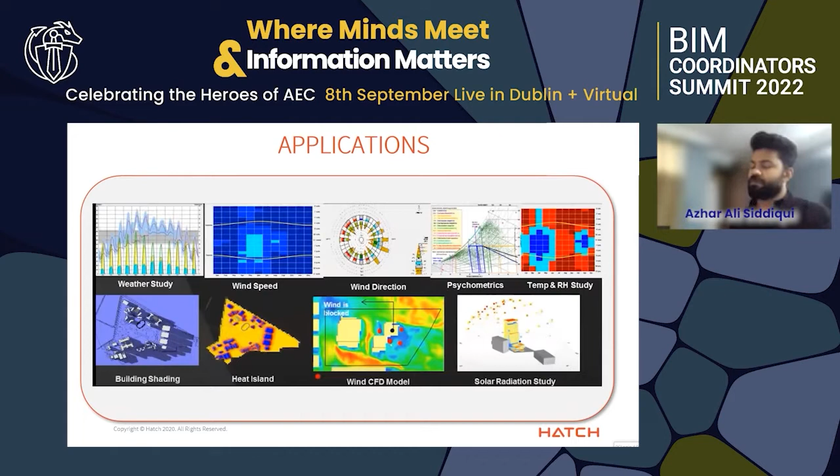These are some of the sustainability requirements from clients in the industry today, and they're growing almost every day, getting more and more demanding each passing year as we inch closer towards the ambitious net zero goals set by respective countries for their infrastructures. As I mentioned, clients are getting more and more demanding.

Here is one of the examples we are going to take as our first case. I want you to focus on the blue box here: the requirement in this case from the client was to bring down the heat gain from the envelope to less than 1 watt per square foot. But how do we quantify such a thing? They wanted 80% daylight space, zero glare, and this is only the envelope depth performance we are talking about.

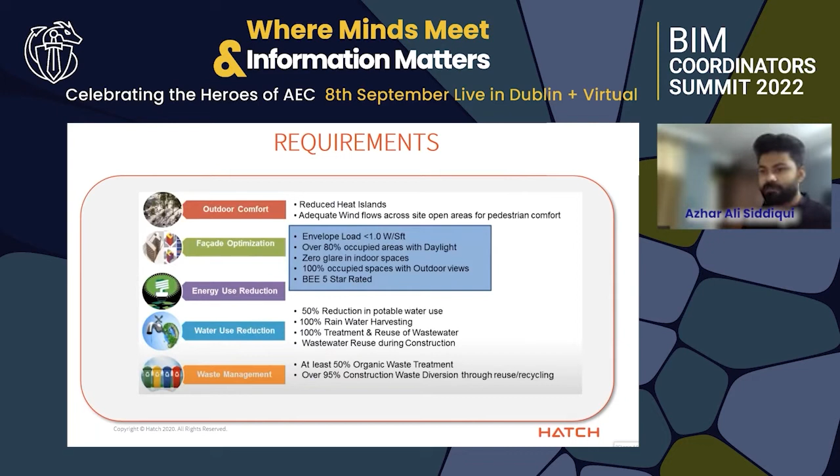This is where BIM as a process, along with its modeling and simulation tools, comes into the picture. In this case, there was a site, and on one side we had three buildings.

Here you can see the glare analysis results in front of you, where the glare component was extremely high. Building A and building B are still in control, but for building C, it's just out of limits, going over the roof.

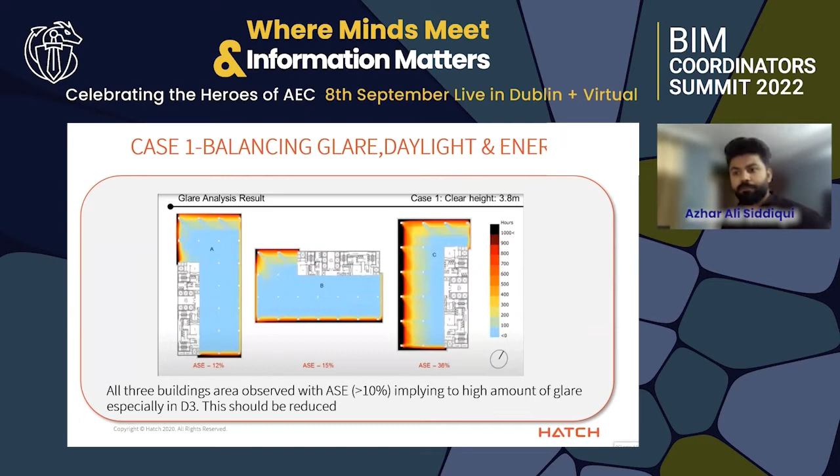The solutions, of course, we do have solutions for that: putting shading devices, using glasses of suitable types. But how do we make the selection? As a first solution, we decided to play around with the type of glass that we are going to use on the facade.

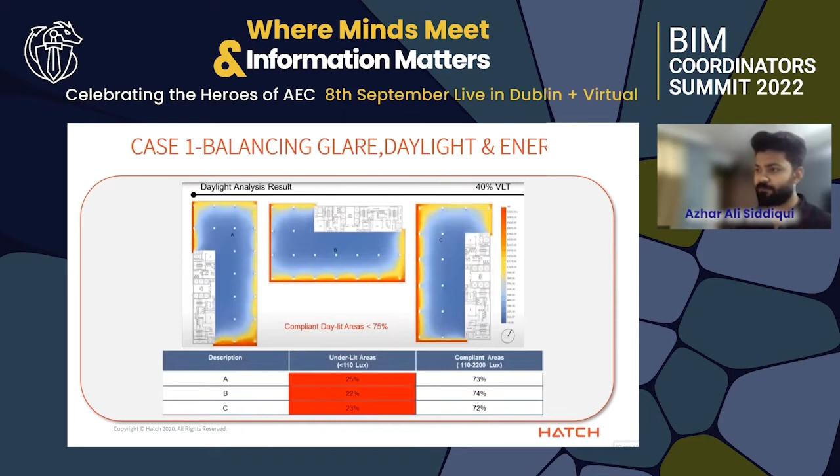We ran daylight analysis with 40% VLT glass, a low VLT glass, checked for compliant daylit areas. They were not meeting the requirement of at least 80% daylit space in the office set initially by the client. We moved forward and checked with 50% VLT glass. Improved results, but still not enough.

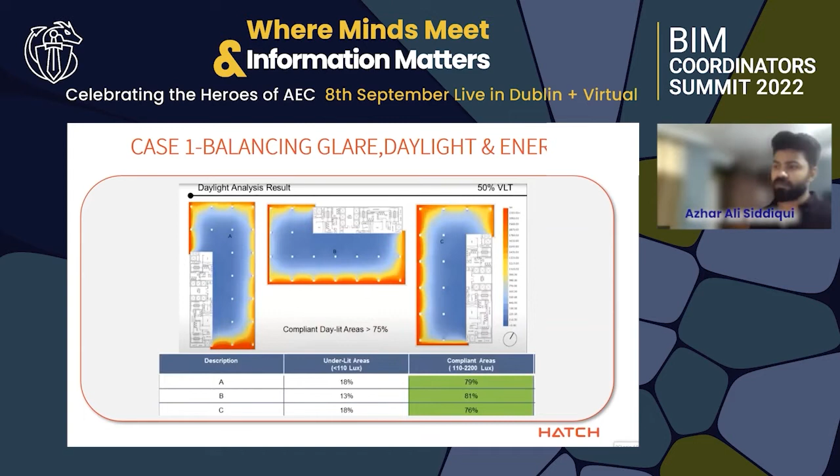We were running simulations continuously using different types of glass. Then we decided to run daylight analysis once again using 60% VLT glass. Building A and B, you can see, were well within the compliance range. Building C, almost there, not exactly how much it should be, but almost there.

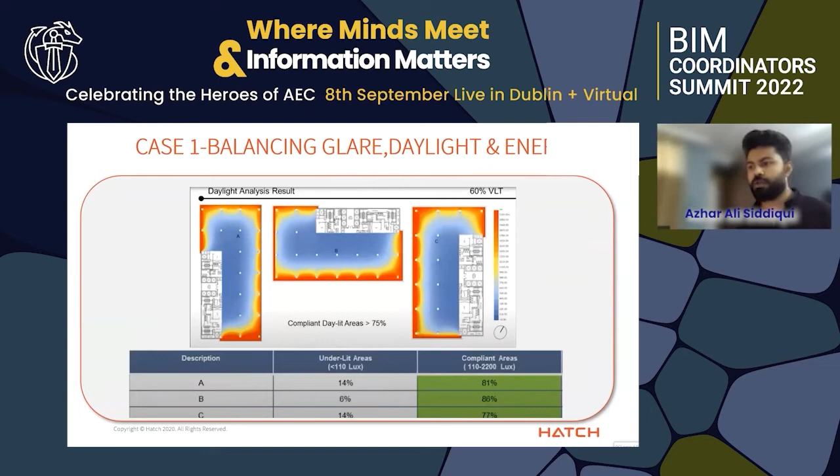We decided to stop here and combine this with other solutions, figuring out that we can always come back, increase or decrease the VLT, and run analysis again if requirements aren't met to see if 60% is sufficient. Another thing we did here was design the shading devices for the facade using parametric modeling.

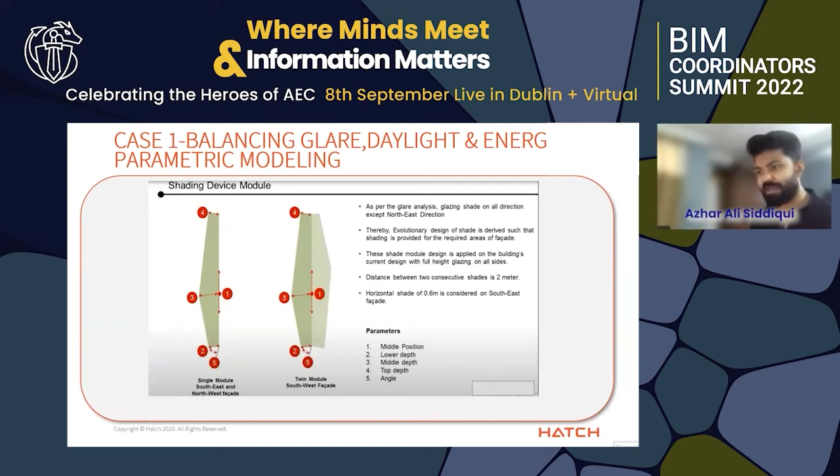We optimized these parameters so that shading is provided for the required areas of the facade. We ran multiple iterations for those parameters: what should be the optimum spacing, optimum angle, and optimum values for different options of shading devices.

We looked for results in terms of areas covered and sunlight exposure. This was done for the shading devices of the facade all around the building, and checked for the best case scenario year round.

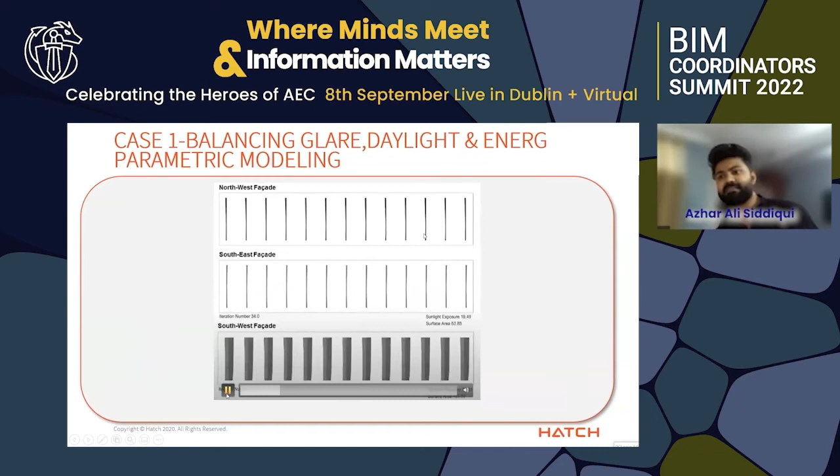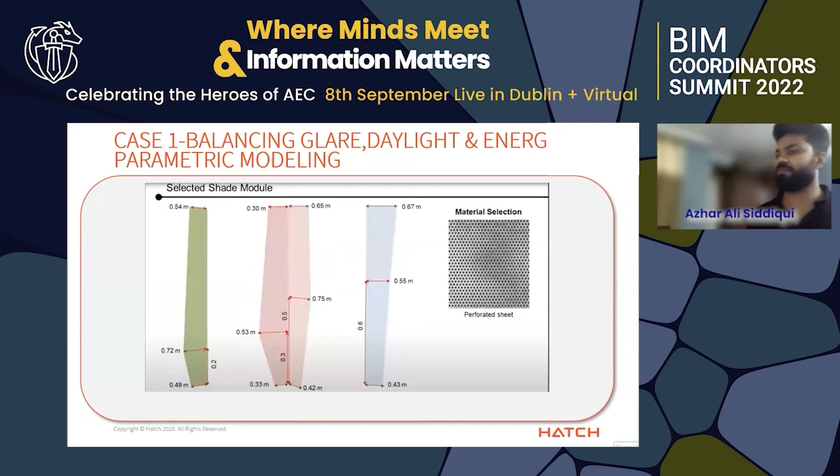So these are a few iterations we ran for this particular shading device. Through multiple iterations and discussions among architect, mechanical engineer, and sustainability consultants, we were able to get these results. The parameters are optimized on further discussion with the integrated design approach team.

We made sure that the glare component and energy concerns are addressed without compromising the daylight requirements. Each and every parameter is tailored for precise need, resulting in proper shading along with savings in terms of material cost.

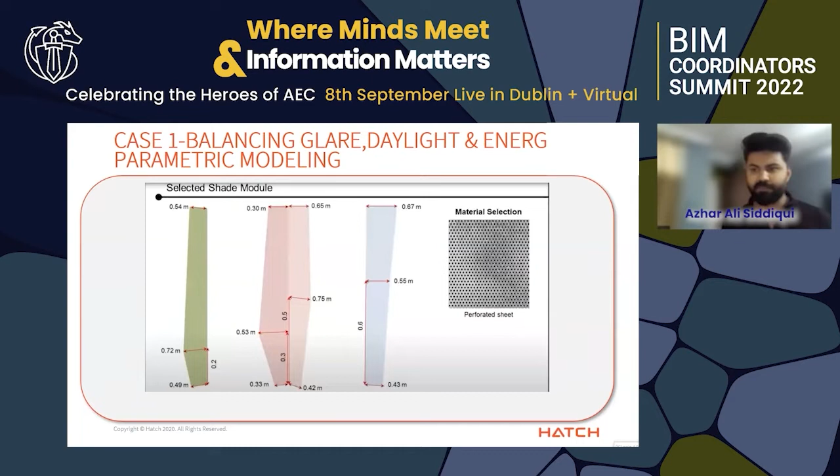This is the glare analysis result after considering 60% VLT glass and using the shading devices we designed in the previous step. We combined both of them.

We combined the results from using 60% VLT type glass with the parametrically designed shading device we just saw in the previous slide. So the glare on building A and B, as you can see, is addressed and is now in control. For building C as well, we saw some sharp reduction in the glare component, but it's still above the required limit. So we decided that we will move forward with 75% VLT glass type.

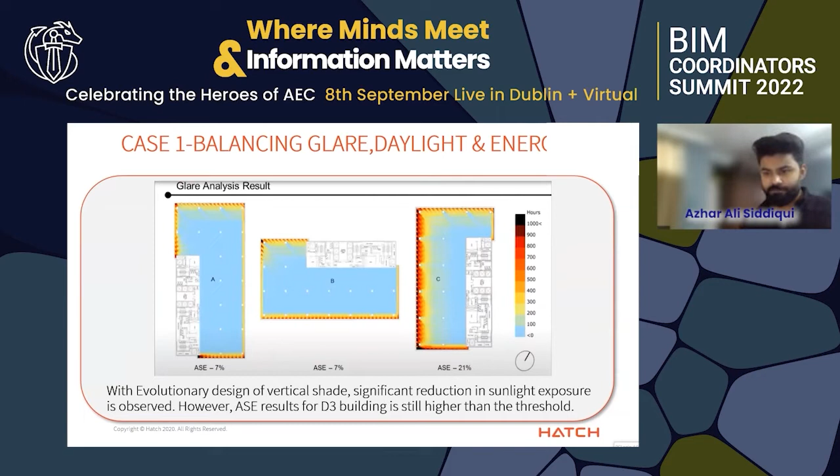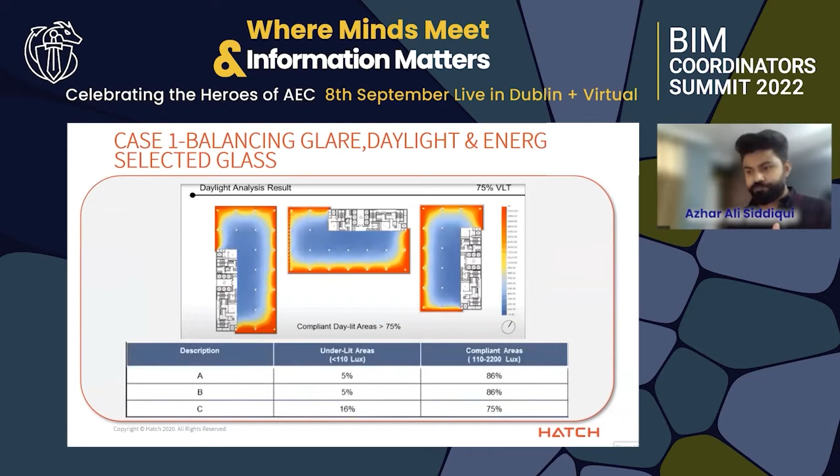We picked up the 75% VLT glass type, ran the daylight analysis once again, and combined the results with the shading device. We were able to satisfy 2 of the 3 major requirements here, getting 75% daylight space along with reduction in the glare component.

Now we had to take care of the envelope load. For that, we decided that we would optimize the window to wall ratio in conjunction with optimizing the U values of the building envelope.

We started by comparing our options with ASHRAE's baseline. As you can see here, we decided to compare our options of window to wall ratio: what are we supposed to get, what are we supposed to use, and compare that with the ASHRAE baseline values.

Of course, greater the window to wall ratio, more will be the annual energy demand. So we have to keep it low, but also keep in mind the daylight requirement. So it's a trade-off, basically—a complex one to get, no doubt about that.

But this is where BIM comes into the picture as a process, setting up the base for this trade-off by making iterations a lot quicker and more accurate compared to manual calculations.

We decided that we'll move forward with 69% window to wall ratio, keeping in mind the daylight requirements, and decided that we can always come back and make adjustments if the envelope load becomes uncontrollable even after further optimization in the U values.

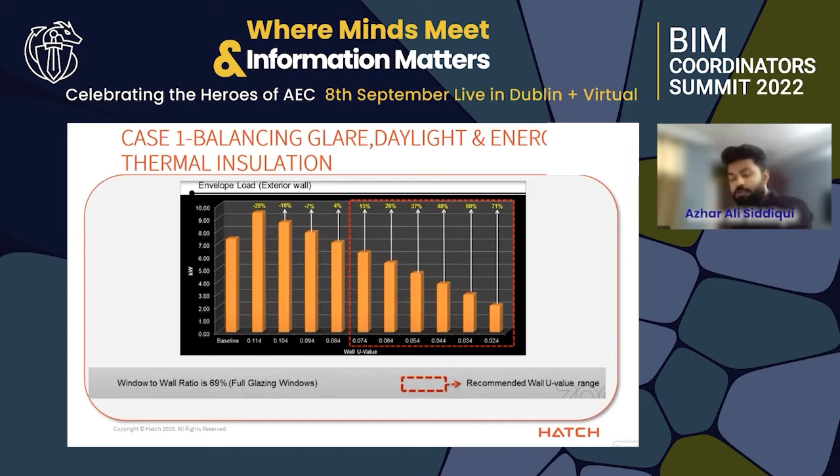Then finally, we optimize the thermal insulation of the building envelope, which is basically the U value. We optimize the U values for external walls, roofs, and fenestrations, and we also checked one for roof, one for fenestration, and then one for fenestration with shading devices as well.

Once we had the best case scenario U values that were less than what the ASHRAE baseline had to offer, and we had to keep it less than that because we were aiming for an envelope load of less than 1 watt per square foot, which is close to 25% less than what a conventional building generally possesses.

We made our recommendations based on different capital costs in case of multiple options. For example, there are multiple options and recommendations, and selection was made based on the different capital costs of these recommendations. Finally, after interdisciplinary discussions and multiple iterations, we were able to generate this recommendation table for the overall envelope load.

We compared our recommendations with ASHRAE recommended baselines. All of these recommendations for U values, in combination with the selected window to wall ratio, use of the shading device designed in previous steps, and proper glass type selections for the facade, helped us achieve the initially discussed requirements, giving out a sustainable solution that is environmentally beneficial, economical, and catering to the comfort of society.

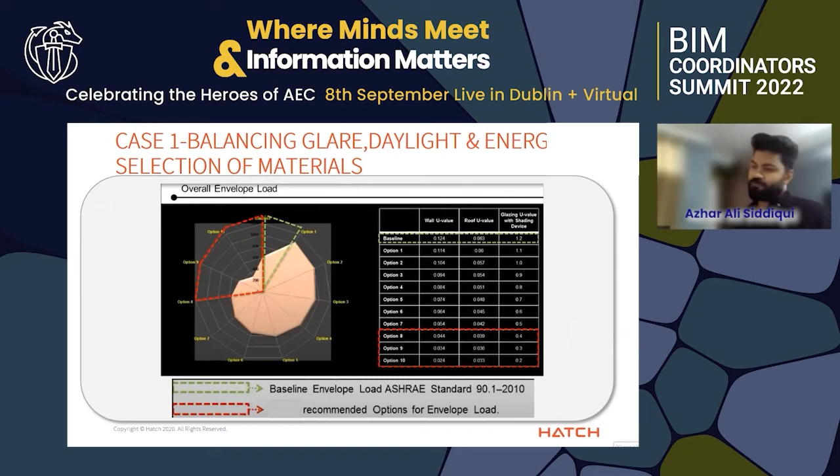So this was about our first case. I'll quickly move on to the second case of the day, which is about improving the performance of a basement. We generally design a lot of basements, and this was a standard basement.

This particular case is one of my favorites just because of the simplicity of the solution we provided. This was a standard basement where we performed conventional basement ventilation calculations as electromechanical engineers. By the end of the design, the owner wanted to reduce energy consumption if possible, in terms of lighting and ventilation fan capacity, and improve the energy efficiency of both systems.

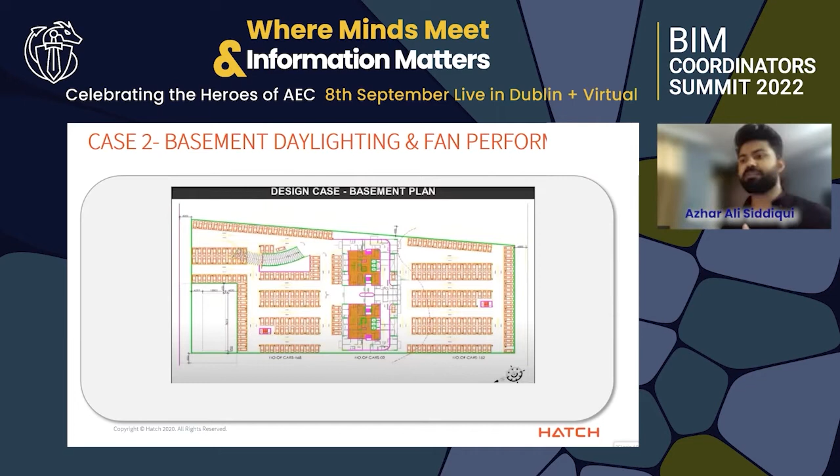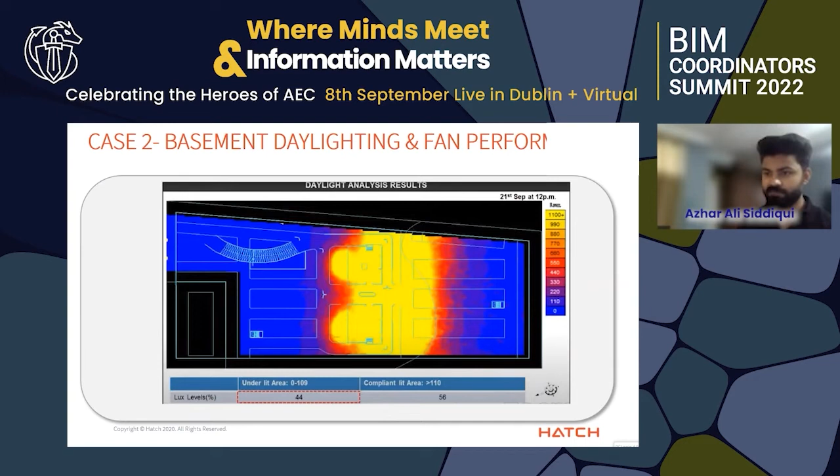As recommended by architects and sustainability consultants, we decided to provide 4 cutouts around the building, put louvers on them, and see how that helps in getting daylight inside. We made those changes in the model, ran a daylight analysis, and found the basement was close to 56% daylit when opting for those 4 cutouts. We also ran a wind analysis simulation for the same 4 cutouts.

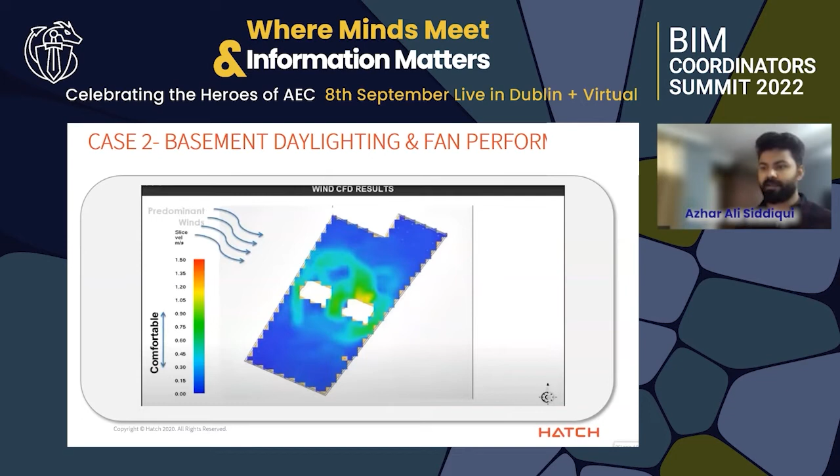We observed a strong breeze flowing in through them, resulting in natural fresh air flowing inside the basement. We instantly decided this could be optimized for better results. Upon further integrated discussion with mechanical engineers, architects, and sustainability consultants, we strategically increased the number of cutouts.

You can see the strategic location and increase in the number of cutouts and their strategic placement. We tested for their best possible placement and then placed these cutouts in the model as well. Using these optimized cutouts, we again ran daylight analysis simulations.

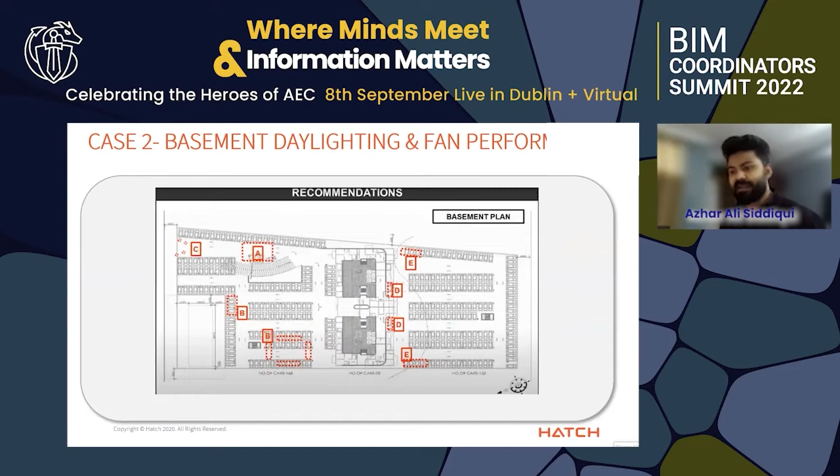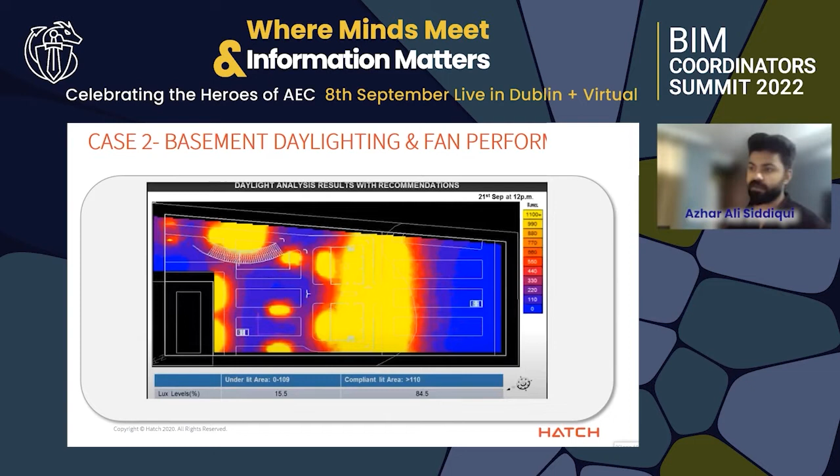We are getting close to 85% daylit areas in the basement, practically eliminating the use of artificial lighting to a large extent during daytime, as well as in case of fresh air. This is how the cutout looked like inside, and you can see the cutouts with the louvers that we placed.

The basement ventilation resulted in a huge contribution from natural fresh air flowing in. Apart from that blue zone at the bottom, almost all of the basement was properly ventilated. This resulted in a reduction in the capacity of the ventilation fans used, saving a lot of money on operation cost and energy, with energy savings as well.

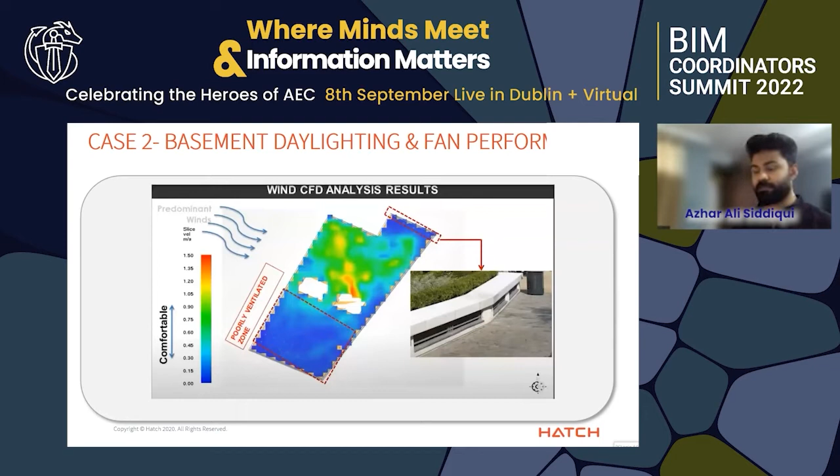This was all in all a very simple solution of providing cutouts and making the use of the basement truly sustainable. As you can understand, we are again hitting the triple bottom line of sustainability by satisfying all three aspects: environment, society, and economy.

I'll quickly move on to my third case study, and I hope I'm not dozing you guys off. This is going to be an example of a net zero building, and a net zero building is always challenging no matter what. Those who have an idea about how that design works, and how consumption and production quantities are matched, might understand how difficult and challenging it can get.

Now, what we did over here as a first solution is that we analyzed the sun path of the building throughout the year to identify the shadowed area so that we can put the solar panels at the best location possible. We determined a trapezoidal area where no shadow was cast and decided on building the car park over there. And we decided that over that car park, we'll put shades, and over those shades, we'll place the solar panels so that the best case incident radiation can be tracked using those solar panels.

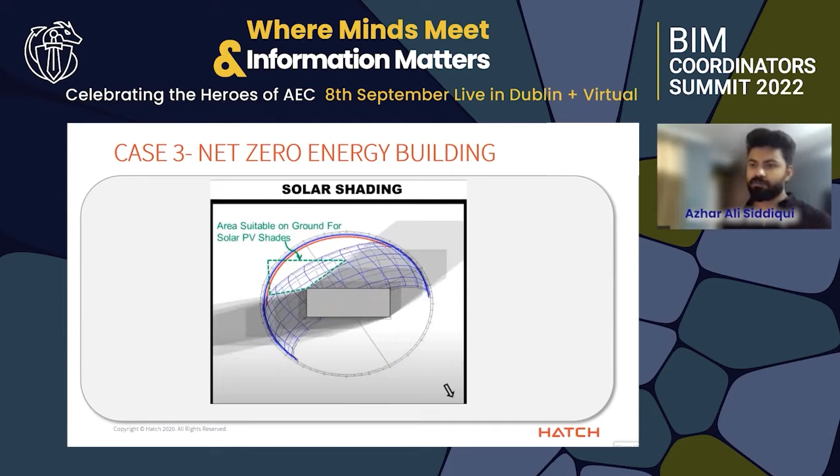Apart from that, we studied the solar radiation of the facade. We decided that we would wrap the facade with solar panels all around, and we would generate from all four sides of the building, from the roof, and from the parking shade as well. But easier said than done. The aesthetics, the daylight compliances, glazing requirements, and energy concerns all pose their own challenges.

Now, what we did over here is that we ran multiple solar analyses with multiple designs of solar panels on all four sides to pick the best optimal solution. We studied incident solar radiation year round for all the facades. We looked at the solar exposure, which is the number of hours in the day solar incidence is happening. Then once we figured out how the sun is behaving with the building, we went on towards the daylighting scenarios, different designs of solar panels on the facade.

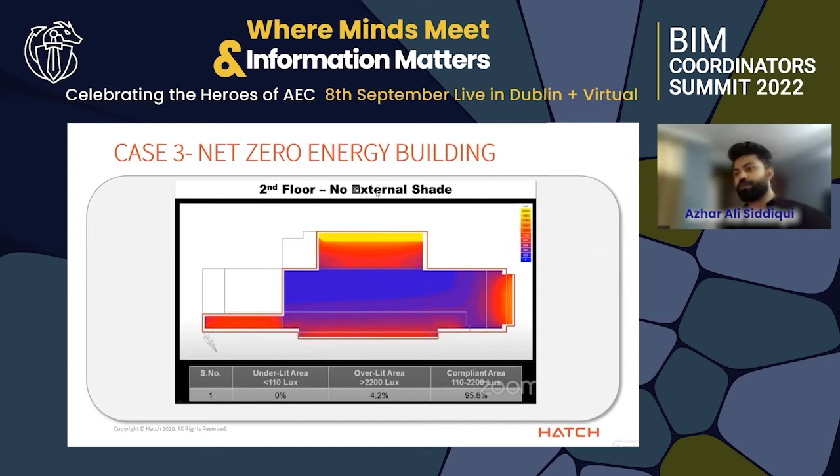Initially, when there were no solar panels on the facade, the building was close to 100% lit, as you can see over here. Then we started putting solar panels in different angles, sizes, and shapes till the point when the daylight requirements were sufficient and there were sufficient daylit areas in the building, and we also had to take care of the maximum energy output production. So it was again a trade-off that we had to carry out using multiple iterations and options, and the daylight requirements had to be balanced with the energy production as well.

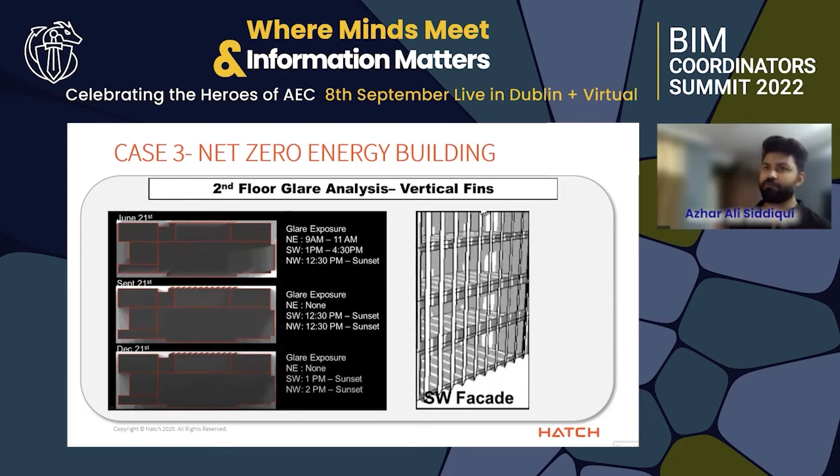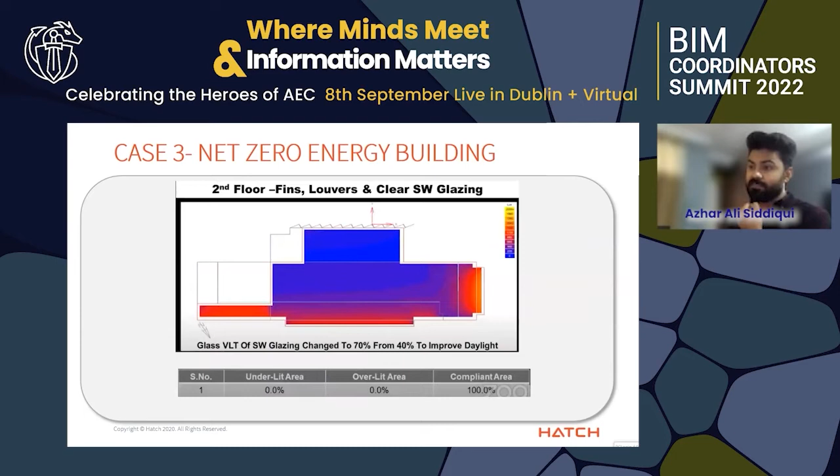And also we had to take care of the amount of heat that is coming into the building through the facade. So after all of these options of placing multiple solar panels in multiple orientations, we finally came to this recommendation over here. We gave various options for placement of solar panels in detail, where we determined the angle, shape, and size of solar panels, and how these parameters are going to affect the glare, energy production and consumption. All of it was determined upfront.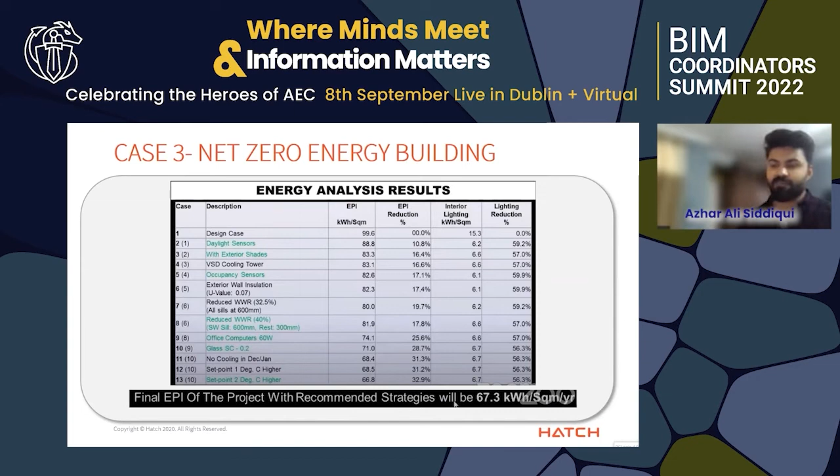Second was to design the building in such a manner that the consumption matches the production, and for that we used those previously discussed active and passive design strategies. As you can see over here, through the step-by-step approaches based on design suggestions and strategies by architects and engineers, we were able to match the consumption patterns with what we were producing to reach net zero performance. And here, as you can see, this is how the building looked after we wrapped the whole building with solar panels in different angles and orientations.

So yeah, this building is in Kolkata, operating right now. It's not exactly a net zero building, but we're close to getting what we wanted. And at the end of the day, most importantly, it's not affecting the environment in a bad manner.

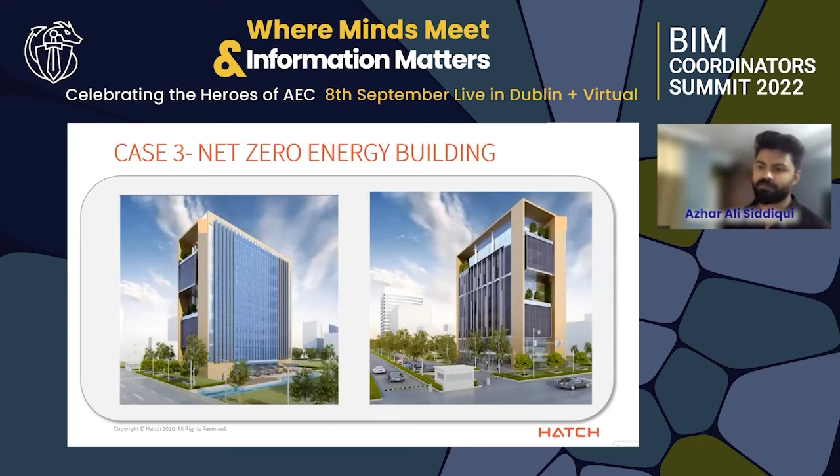Before I sign off, I would like to take this platform to urge each and every one to spread the word about the climate emergency in your organization, because I feel only a motivated architect or engineer can take this challenge as a responsibility and not just work on it as another corporate exercise and limit it merely to jargon, just like we have been doing for a lot of things out there without actually knowing the true meaning of it.